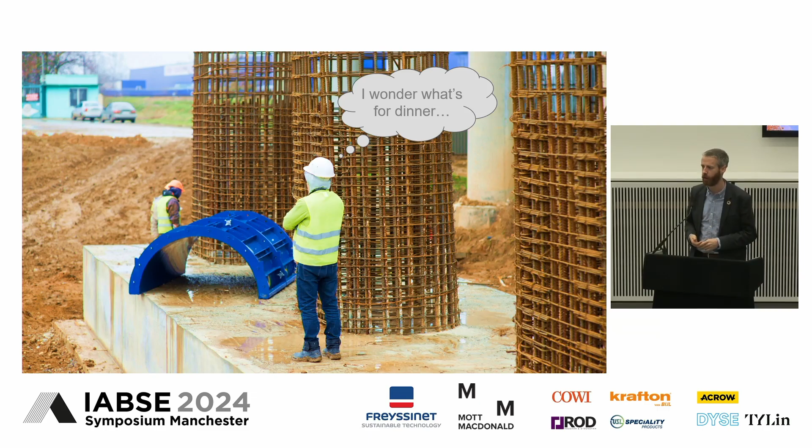But if you go onto a construction site today, you might be forgiven for thinking that no such declaration has taken place at all. Bridges rise out of the ground in the same way they always did. Buildings being built today look the same as they did 5 years ago, more or less. We talk a bit about reuse, we talk a bit about embodied carbon. I would hazard a guess that not many of you are talking about the wider environmental impacts of where the sand comes from in your concrete or the water that we use and so on. We don't tackle this bigger picture. And I would argue that we're not really making the progress we need to make.

So what I want to take you through for the next 25 minutes is a reminder of the impacts, the scale of impact that we have, a proposal for what we can start to do about this now to tackle this broader picture than just carbon. And then I want to pose a question at the end as to whether or not net zero and net zero carbon is even the right thing to be aiming for in the first place, because perhaps that's why we're not really making the progress that we need to see.

So let's start by looking at impact. I want to start by talking about the lifespan, life cycle of a material, a construction material or any material for that matter. It kind of goes through these 3 steps. We take something out of the ground, we dig it up and we pluck it out of the ground. We turn it into something useful that somebody decided that they wanted at some point. On the way here, I decided I wanted a flat white. So, we turned some materials into this. We use it and then we throw it away, right? We discard it for the most part.

And I'm not talking about 10-gram cups made out of paper. I'm talking about 10,000 tons of concrete and steel at a time. We throw them away. In terms of the impacts, in terms of the scale, the order of magnitude of all of this, 50%, half of all materials extracted around the world every year go into construction.

They are construction materials. 1/6, 15% of all carbon emissions are due to the production of construction materials for buildings and infrastructure. Most of that is steel and concrete. And then the waste that we create, the stuff we throw away at the end, well, about 1/3 of the world's waste comes from construction materials.

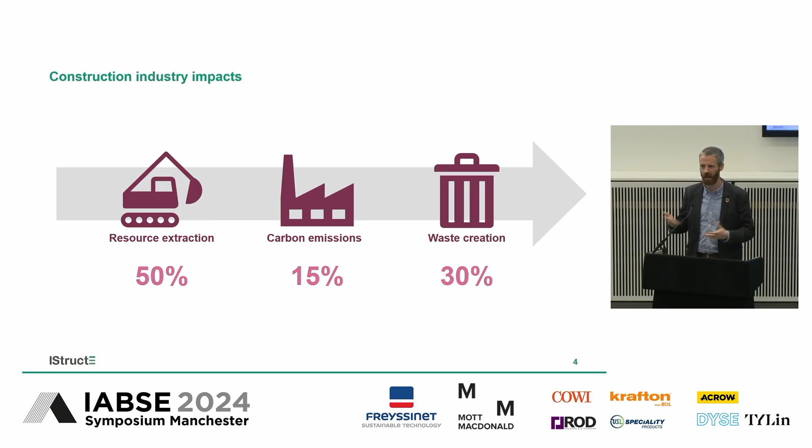So it's absolutely phenomenal, the impact that our industry has on this world. And there's not very many of us, which means the impact per person is relatively high compared to the impact per person of a dentist going through disposable gloves and things like that.

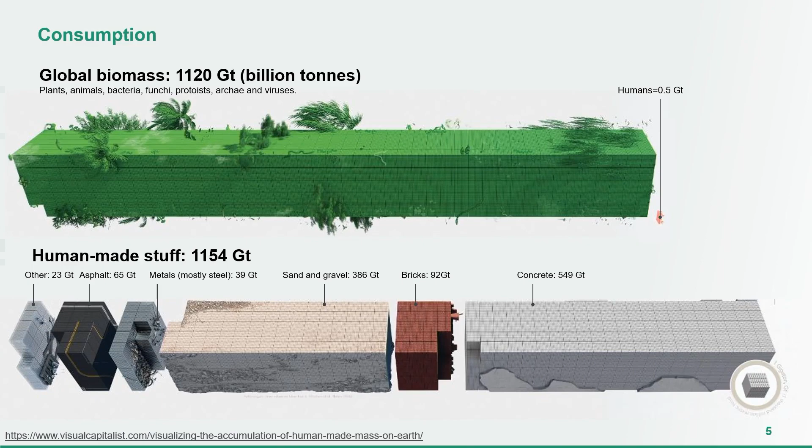We extract and use so much stuff on this planet that in 2020, the weight of all human-made stuff surpassed the weight of all naturally occurring biomass around the world. There's more than 1 trillion tons of stuff that's been made by humanity now. And that's more than the 1 trillion tons of living things that exist. And we add about 10% to that figure every year.

So this was 2020. I've not seen the updated numbers, but we extract about another 100 billion tons of material per year. And every time we extract and add to the bottom of this diagram, we have a negative impact on the living stuff on the top of the diagram. So as we dredge gravel from rivers, we impact the stuff that used to live there and probably doesn't anymore.

As we process these materials into construction materials, as we come to think of them, as we heat them up and we bake them and we change them chemically, we release greenhouse gases, we release pollution and so on. And then when we leave this waste behind at the end of life, that has knock-on impacts as well.

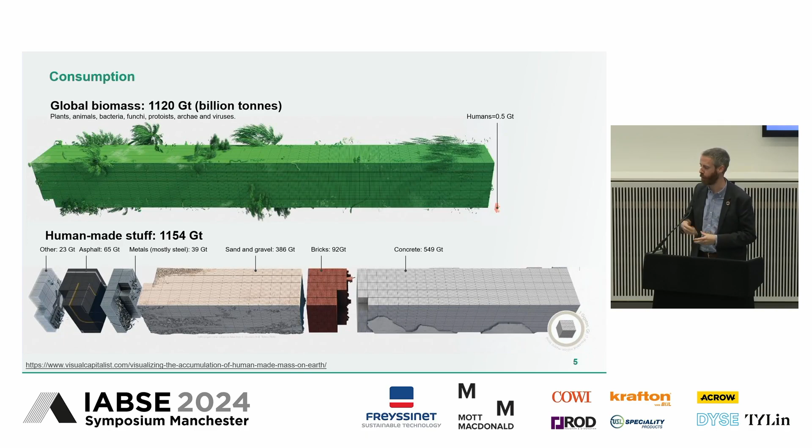The bit out of all of this that we are talking about, thank God, is carbon emissions. How do we get to net zero? How do we reduce carbon emissions? How do we decarbonize our materials and the way we use our materials? This is the one topic we are talking about. And there's been quite a change in the last 5 years in the construction industry, at least in the countries that I work in, where people have started to put this front and centre, which is very much needed.

But let's see how well we're doing. We'll just do a little marking session. We'll see if we can mark ourselves out of 10. So as I mentioned, most of the emissions that come from construction materials come from steel and concrete. About 2/3 of all construction material emissions are either steel or concrete.

The UN refers to these materials as hard to abate emissions, by which they mean it's bloody complicated to get rid of them. And it's basically because we need a huge amount of energy, because we have to melt and bake things at about the same temperature as the flames at the bottom of a Saturn V rocket. And these flames run all day, every day, throughout years and decades. And then we change the chemical composition of these materials, and in doing so, we release carbon dioxide as a chemical reaction. It's unavoidable. So these are really difficult things to deal with.

To be very clear, there's no silver bullets with this. So if any of you are sat there thinking, oh yeah, but it's okay because there's a thing called GGBS and we can use that instead of cement, and there's a thing called scrap steel and we can just recycle that, you cannot. Both of those materials are constrained and fully utilised globally. If you ask for more of it, somebody else will get less of it. Global emissions stay the same. There are no simple answers to this.

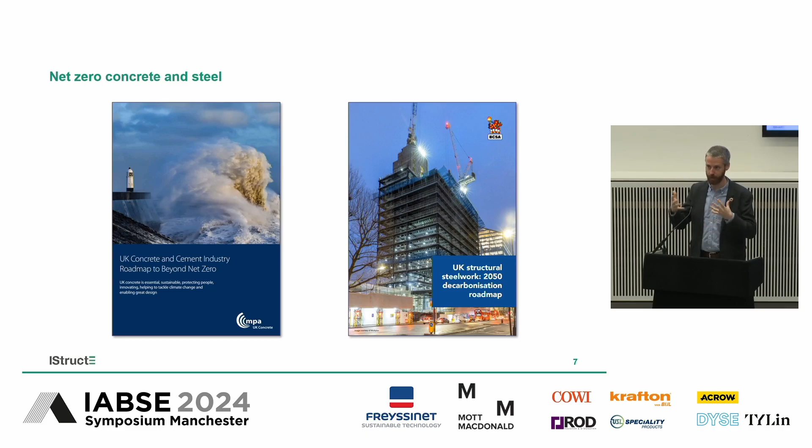So instead, what our materials industries are proposing is novel ways of making cement, novel ways of making steel, primary steel from scratch this is. Both industries are relying on hydrogen. Both industries rely on carbon capture. So the good news is we've got a plan, right? We know that if we do these things in order, we can demonstrably make these materials with near zero emissions.

And the good news is that the industries are telling us we can do this by 2050, which is, of course, a very long time away, although not as long as you think. When you add up the numbers, it's about 26 years from now. I'll still be working. A lot of you will still be working. Probably almost all of you will still be alive, so it's not that far away. But we will get there, right? The materials industry say we will get there by 2050, so that's good news, right?

Unfortunately, it misses quite a big piece of the puzzle, because what we care about is not the emissions being released in the year 2050. What we care about is the sum total of all emissions between now and then.

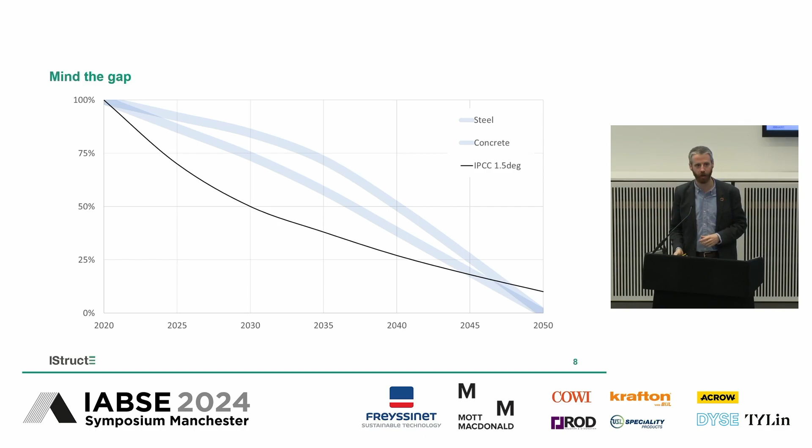It's really simple. So the elephant in the room with all this decarbonisation, all this net zero 2050 talk is, yes, we have a way of technically producing steel with no emissions. We think we have ways of making concrete from cements that are produced with no emissions, but we won't get there in time, and it's far, far too slow. So the one area of all of that environmental damage I talked about that we are discussing, we are considering, unfortunately, we're going far too slow on. Marks out of 10, we might scrape a 2 or a 3, I would suggest. Room for improvement.

Now, if that's the elephant in the room, then it's a pretty bad metaphor, but I was trying to think of what would be even worse than an elephant in the room, and I came up with a whale in a fishbowl. I think the whale in the fishbowl here is all that other environmental damage that we're not talking about whatsoever, because we have no idea what the graph for that looks like. We have no idea what our impacts on nature look like for that.

And it's interesting because the UN speak about carbon and biodiversity loss and pollution in the same sentences. They talk about a triple planetary emergency. The Sustainable Development Goals tackle all of this together because they're all interrelated. So we probably need to start doing the same thing. The facts are really simple.

You can produce the lowest carbon concrete in the world and pat yourself on the back for the carbon emissions bit, but if you want to pour 100 cubic meters of it, you still need 120 tons of gravel. You still need 60 tons of sand, 60 tons of limestone, and 17,000 litres of fresh water. All of that stuff comes at an environmental cost. There's pollution, there's land use change, there's habitat disruption, and so on.

And we talk about biodiversity net gain on our sites. We talk about planting hedges and trees and stuff around the things that we create on our sites. But we don't talk at all about the equivalent impacts where our materials come from. And this is important because actually I think this is where most of the problem lies.

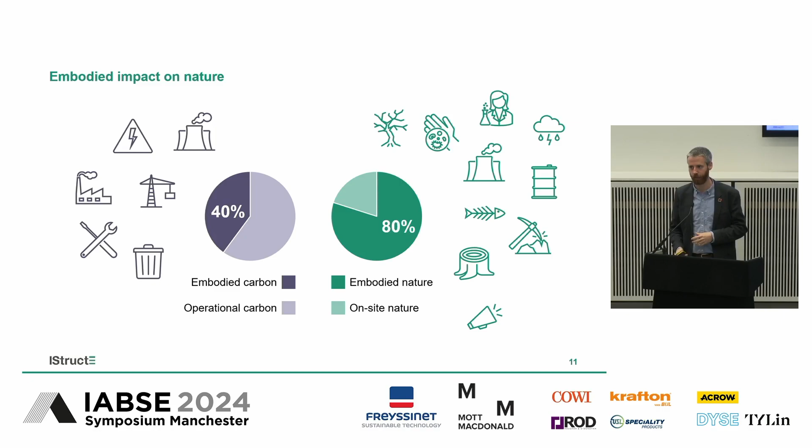So to summarise the problem, the impact as a whole is enormous. We know that, we've been talking about that for long enough, but hopefully you see now this is more than just carbon. The bit we are talking about, the carbon bit, we're not going fast enough, and the rest of it we're not talking about at all. So with that, I want to try and propose some solutions to you. I'm going to try and give you some things that you can go away and start to do as we move forwards.

And the good news is I'm not going to propose any new metrics. You don't need to do any new form of counting. We don't need to use any new units. There's a really nice qualitative approach to all of this. And it follows 3 words. Use less stuff. It sounds pretty simple. Use less stuff. But it tackles all of this at once, right? Because if you use less material, you have less extraction, less pollution, less greenhouse gas, less waste, and therefore less impact on ecology. You don't have to do the maths to know that it's better.

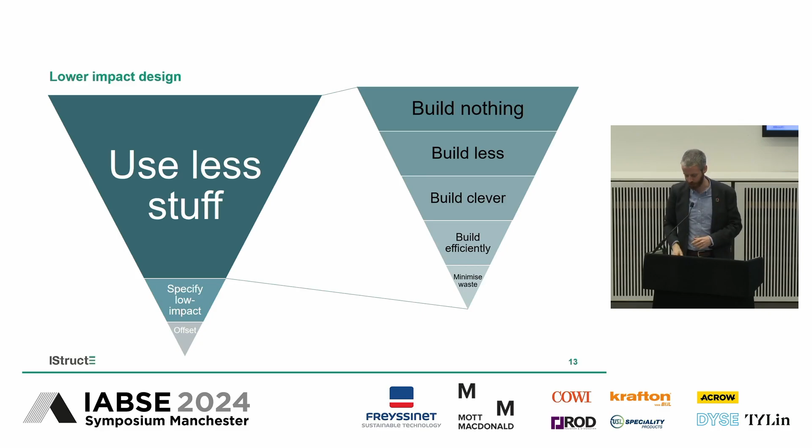And my challenge to you throughout this symposium, throughout these next 3 days, is to start asking yourself, with these examples I'm seeing, where in that hierarchy do they sit? Because it makes for a wonderful story and a fabulous presentation to talk about some shiny new technology that helps us do something more efficiently, particularly if it uses AI, modern methods of construction, and other acronyms that I forgot to write down before this presentation. We can get very excited and very carried away. But if all it enables you to do is a 15-20% reduction in material use, that's nowhere near good enough. Not even close.

The stuff you need to be looking out for with your magnifying glass and your deerstalker hat is the stuff that said, because of some clever engineering and some good decision making, we managed to avoid building stuff. That's where your biggest impacts come from.

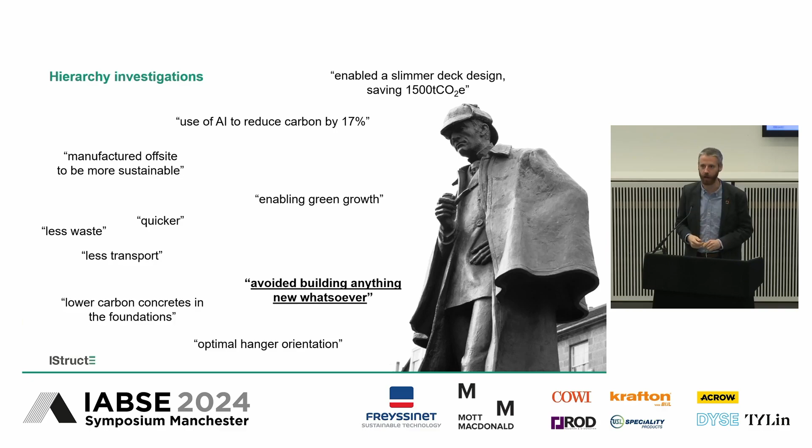And if we go back to that graph of material production, what we realize is, well, the gap between the decarbonisation projected for concrete and steel versus where we need to be, that gap by 2030 is pretty big. It's about 30%. What that means is, on average, across this industry, by the end of this decade, 6 years' time, we need to use 30% less stuff. 30% less stuff is build clever, it's in the middle of that triangle. That means the average project, across all projects, needs to use less stuff.

You lot, I'm expecting, will tell me we're better than average. We're market leaders. We are here as a centre of excellence to share knowledge about how we do these things the best we can. So you are not aiming for 30%. You lot need to be aiming at the top of that diagram. So it's build nothing and it's build less. And that tackles the carbon bit, but it also tackles all the other ecological impacts we don't yet fully understand. And that's the challenge going forwards.

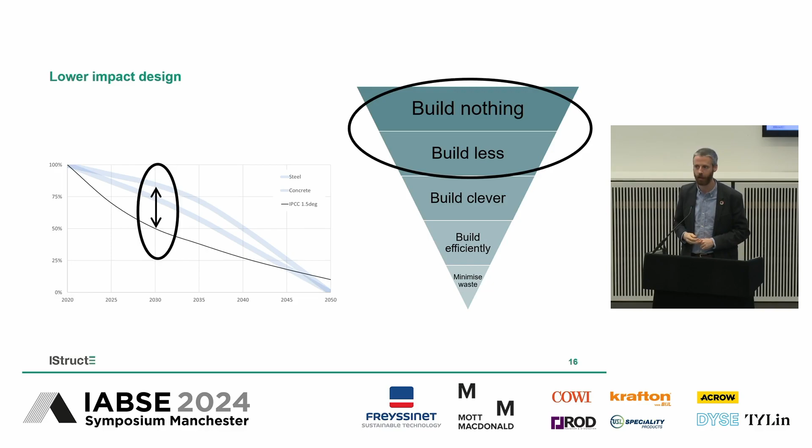But that takes me on to the third and final bit of this talk, which is to pose the question as to whether that's ever going to be good enough. Is it good enough to do less harm? If you spoke to a doctor and you asked them what their mantra every day they went to work was, and they told you that they just try and do less harm to their patients, how would you feel? Would you book an appointment with that doctor?

Is it good enough to do less damage? Is it good enough to emit less greenhouse gases? Is it good enough to kill less fish, if you want to boil it down to a really basic level? Is being less bad going to fix our problems?

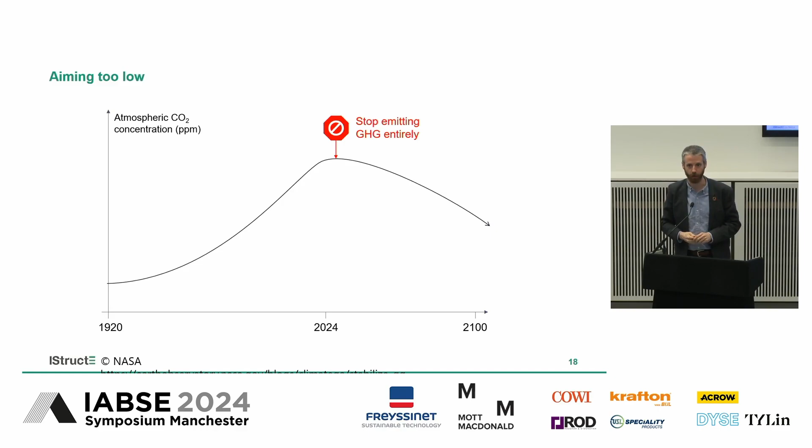The same is true of what we're doing to nature. If we, at the moment, have got big open cast mines that are spewing out pollution in terms of noise and dust and chemicals going into the ground and so on, that's damaging all the stuff that lives in that environment, and it has a knock-on impact for tens of kilometres in every direction. If we just close the mine tomorrow, nature won't just recover overnight, it takes time.

And whilst we're waiting for that recovery to happen, of course, we've damaged and lost something like 2/3 of all wildlife around the world, and we continue to damage it because of what's happening to the climate. So you've got these vulnerable pockets of nature that we could leave alone in the hope they recover. Meanwhile, we're getting worse and worse storms and flooding and fire and drought and so on. They don't have a very good chance. So doing less damage doesn't really seem like a viable goal to fixing all of this, does it?

We ordered beer and wine and pizza and spirits. And then you probably remember waking up the next morning with a bit of blurry vision and a banging headache, and you looked around and you were surrounded by effectively a catastrophe in your parents' house.

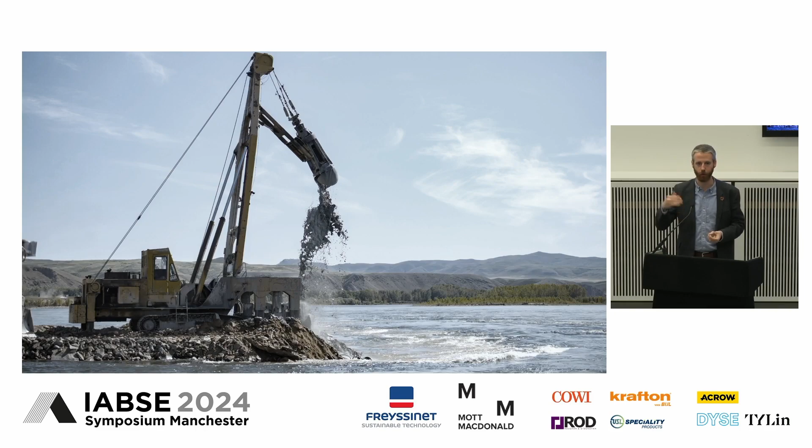And when we talk about regenerative design, this is what people mean. They mean aiming to do more good. That's the general outcome of regenerative design, is do more good. We recently released a book about this at the institution called The Regenerative Structural Engineer. I'd highly recommend it. It's pocket size as a book. It's not a guide. It's not a Eurocode guide.

It's a book. And in there, the authors define regenerative design as, oh my God, that's a different font to what I put in originally. So it's even bigger, so you can definitely see it. The goal of regenerative design is for human and living systems to survive, thrive, and co-evolve.

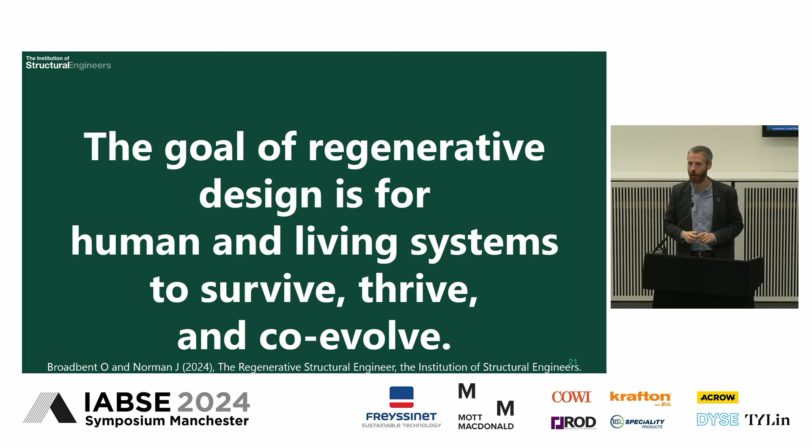This is different to what we talk about with net zero. It's different to how we talk about sustainability. This is not human stuff happening in isolation, as we do with, say, carbon. This is recognizing we're part of one system. And as nature disappears, it affects us because we lose food crops, we lose resilience in our forests, and therefore forest fires happen, and therefore we get into feedback loops and so on.

So it recognizes that systemic thinking. And the goal is not to do less damage, but it's to help these systems that we're a part of to survive and thrive and co-evolve into the future. That's the goal. That's the definition of regenerative design.

And in terms of how that applies to structural engineers, to all of you lot, this comes back to materials. If we go back to those earlier slides about extraction and use and waste, that's where our impact can be. And our impact can be huge. We know it can be huge because at the moment it's hugely damaging. So it could be hugely positive.

So we could switch from creating less waste to using waste in our designs, drawing down on waste, not using anything unless it was either waste or completely renewable in a short time span. Instead of talking about reducing poverty, what if the goal was zero poverty and then the opposite was to get people as far away from that poverty line as we could through every bit of activity on our projects? Not just the fact that at the end of it we're left with a building and that's a good thing, but the construction methods behind it, the design methods behind that, the extraction methods behind the materials.

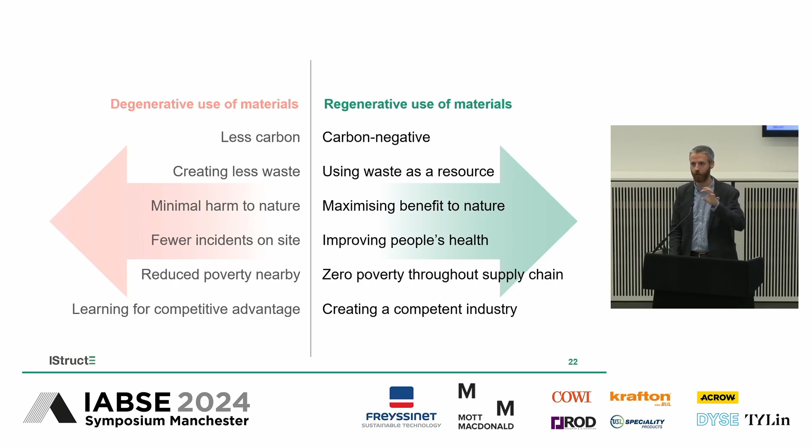And because you're probably sitting there thinking, that's great, Will, but that's very hypothetical and you're no longer a design engineer, so why should I trust you? I'm going to give you 3 examples of people doing this today to try and hammer it home that this is possible. There's 2 caveats to this.

Number 1 is that these are all relatively small scale. And a lot of people say, oh yeah, but it works on a small scale. We'll never scale it up. Well, most inventions in the past and most new ways of thinking have started at a small scale. It's our job to work out how to scale these up, how to apply these in a commercial environment in the so-called developed world. Because if we can do it in the developing world, then by definition, if we're more developed, as we claim to be, we should definitely be able to get away with doing this stuff.

Number 2, the second caveat, well, it's not a caveat, but it's a point to note. When we talk about design in this sense, it's a verb, not a noun. It's the act of designing. It's not that you end up with a piece of design that is regenerative. It's the act of doing this that is regenerative. Because it's about asking these questions, it's about understanding this stuff, and it's about working in a way to create positive outcomes.

So the first example, I'm very pleased to say, and I didn't even know that you were going to be the main charity for this event, so that's lucky, isn't it, is Bridges to Prosperity. And it's not because the end use of the bridges is phenomenally positive, because of course it is, and that's what you're well known for. The reason why I picked B2P is because the construction methods you employ, the design methods behind them, they create jobs, they draw down on waste because you reuse materials, they aim to be as positive as we can be. This is not about doing less harm with our work. This is about doing as much good as we can.

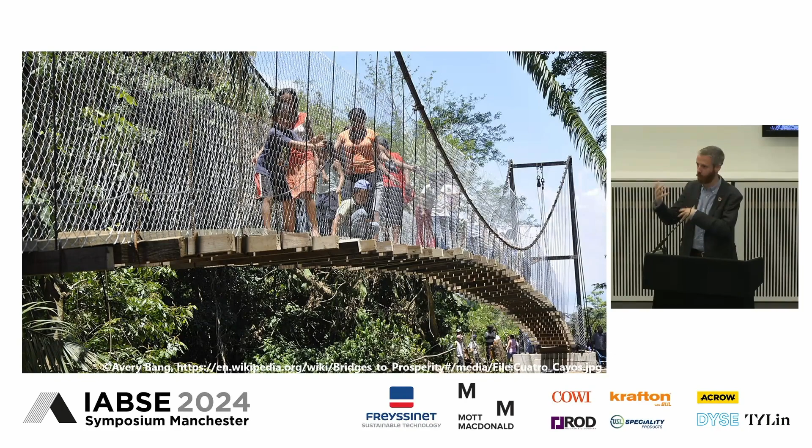Survive, thrive, and co-evolve. As the weather gets worse, and the flooding gets worse, and every now and then that bridge gets damaged, people who live there have co-evolved with it, they can deal with it, they can fix it. So you're working in a regenerative way. So this is bridge building with the sort of aim of wholly positive impacts.

It's not. What's regenerative about this was the fact that the engineers wanted to use this project to try and change the industry as best they could. They saw the systemic problems with extraction and use and waste generation, and they said, we've got an opportunity to do something different on this project that people are not doing, because people have not been reusing steel very well recently. They were doing it fine 100 years ago, but not recently.

So they said, we're going to change things, and we're going to use this to create as much impact as we can. So they created tools for doing this, and they gave them away to the industry. They run training for other people. They go in and do lunch and learns.

They've given away all their company secrets around reusing steel. They've written guidance with the SCI and so on, and it's helped the industry to move quickly in a direction towards being able to reuse steel frames. And the acceleration on this topic in London in the last 2 or 3 years has been phenomenal, helped by people like Heyne Tillett Steel.

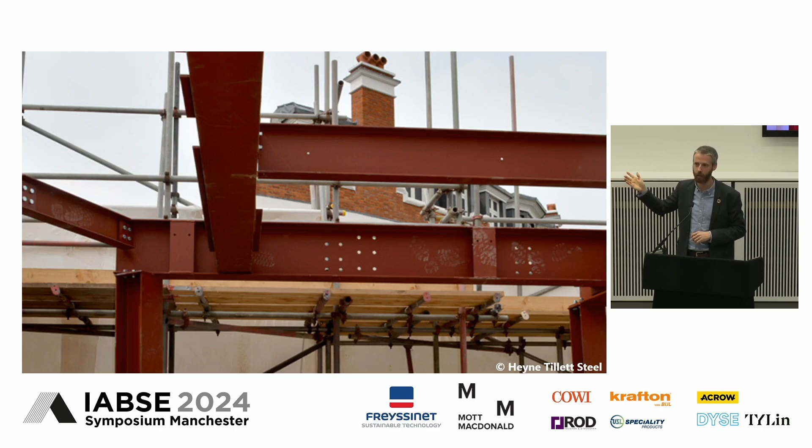So this is not a project, this is not an example of steel reuse, this is an example of construction in a way that changes the industry. And again, it's the verb, it's the act of design that does that. And then the final of the 3 examples is a project out in Rwanda, probably not too far from the bridge that I put up at the start, by Mass Design Group.

And Mass have this sort of ethos of working where they want to wholly understand what an area needs, what a system needs before they start designing for it, which is something I don't think we're typically very good at on our projects. We usually take the brief and assume the brief knows everything and we get on with it. They don't work like that. They go in and they work out what's really needed.

And so this project, this was the construction of 50-something new buildings. It's a new university. But what's regenerative about it is that the materials they use, the processes they use, the way they approach construction were all designed to increase jobs, increase training in things that didn't exist. They tried to make earth sexy again because there was a whole lot of earth buildings in Rwanda, and then the government decided that this was a poor person's material, and they nearly got as far as banning it. So this was used to put it back on the agenda. These were design decisions entirely driven by sort of local needs.

And if you take those 3 examples, so you've got bridge building with this sort of aim of wholly positive impacts, you've got construction in a way that tries to change the system, and you've got design decisions understanding those broader needs, this is what we mean by regenerative design. These ways of approaching design get us from less bad to more good. It gets us into a process of design that gives us some chance of helping people to survive, thrive, and co-evolve into the future. And it's that mentality that we need to start working out how to scale up onto our bigger projects. Yes, these are small.

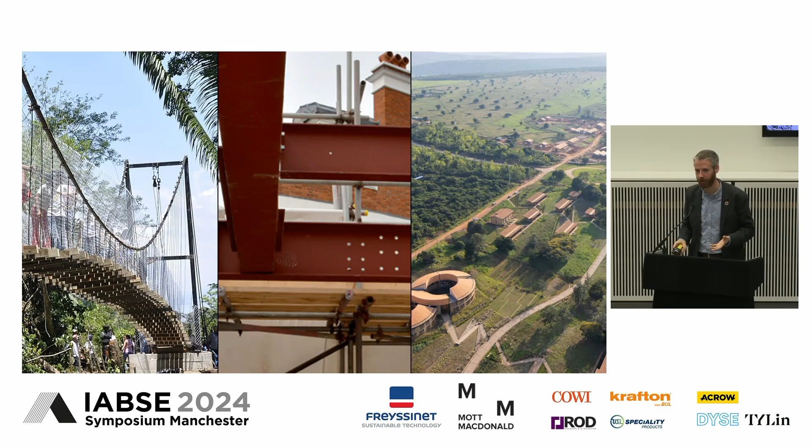Yes, a lot of it's sort of charitable work. Your challenge now is how do we apply this to commercial situations with insurance and risk and liability and all of those sorts of horrible words that I hate. How do we question the brief? How do we bring the clients along for the ride? When do we speak to them about it, and so on?

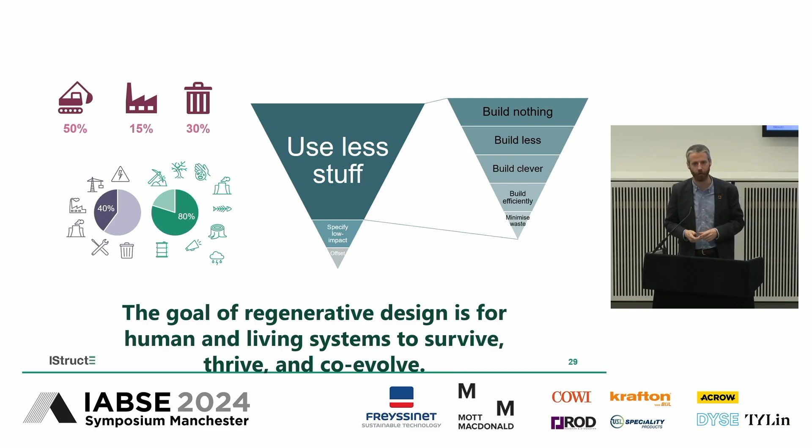So my final 2 slides in summary for you. Impact to the industry is huge. You already know that, but the numbers just get worse every time we sort of dig a bit deeper, frankly. Use less stuff is a pretty good mantra. Hopefully it will help you today with your work. But we need to recognise that that's an interim step, because that's do less harm, and we need to start doing more good. Which means that over the next 3 days, my challenge to you will be this.

Be a critical friend to each other. If you can't quiz each other with difficult questions here, you definitely can't do it out there in the real world where your clients can hear you. So we need to do this here. And when you're being critical, try and ask 2 questions. For examples today, where does this sit on the hierarchy? How could it have been higher? Is this a 10, 20% saving? Why is it not an 80, 90% saving? What would have to be different next time?

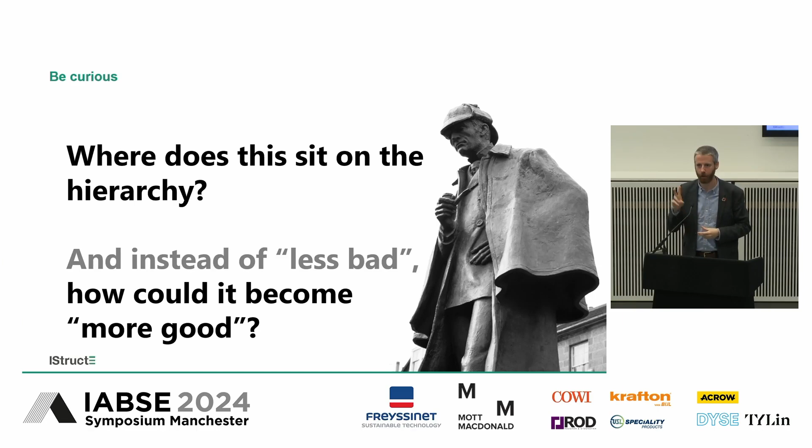And then, more fundamentally, when we talk about next steps, how could we go on a project like this from being less bad to more good? How can we take those examples of those projects that I just showed you and try and apply them in situations like this to try and get this way of thinking into the mainstream? Those are your two challenges. I look forward to hearing how everyone gets on over the next few days.